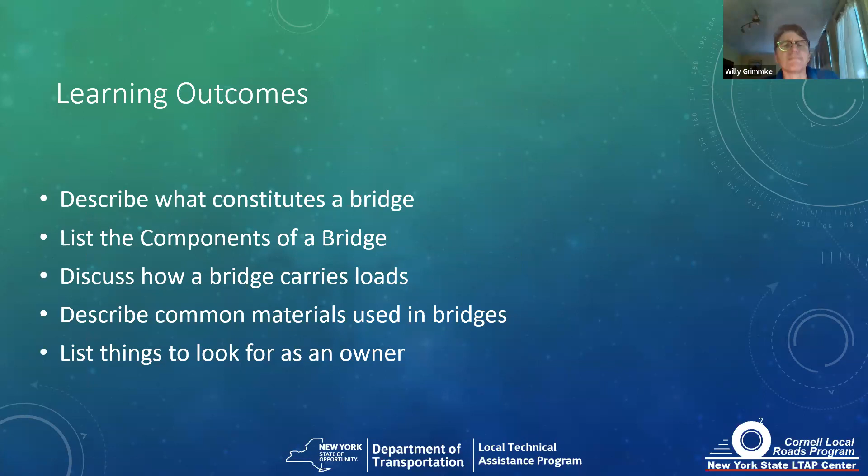I don't know what's going on with the poll, but let's try the next one. So I have, what is your primary job function? Let me launch that. All right, here we go. Primary job function: admin, superintendent commissioner, engineer, field crew, board member, or I don't do any of that stuff.

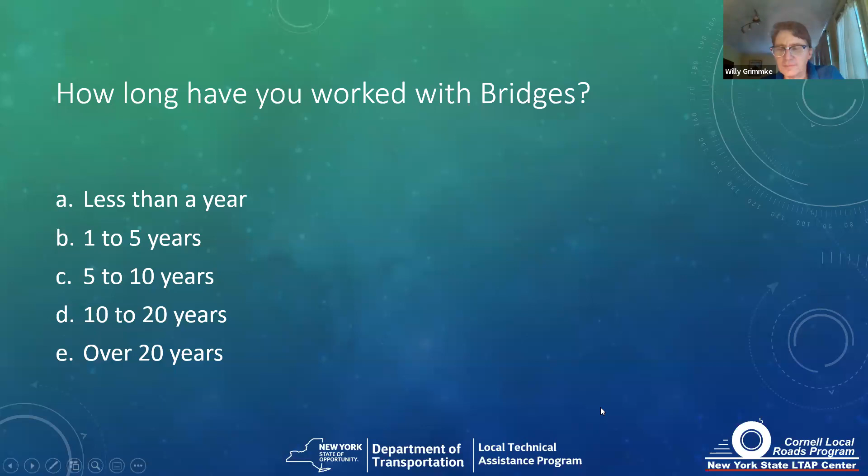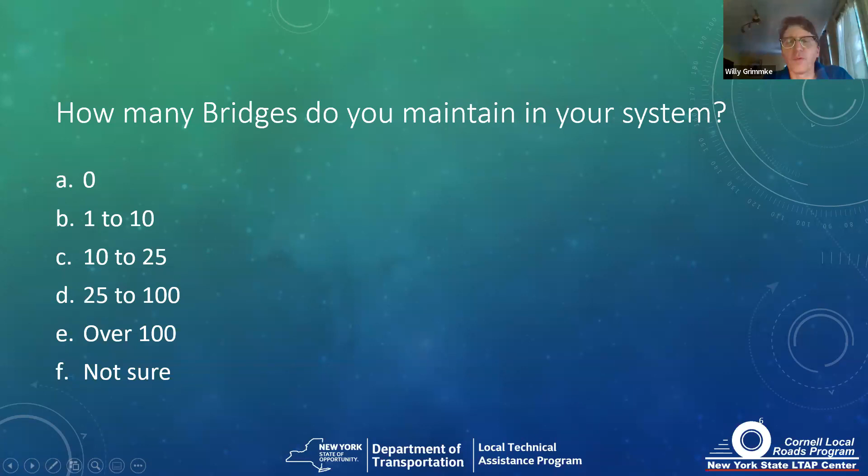But by definition, what is a bridge? The feds in 23 CFR 650 define a bridge as a structure, including supports, erected over a depression or obstruction such as water, a highway, or a railway, having a track or passageway for carrying traffic or other moving loads, with an opening measured along the center of the roadway of more than 20 feet. That's the magic number. Measured between the undercopings of abutments, or spring lines of arches, or extreme ends of openings for multiple boxes. It includes multiple pipes where the clear distance between openings is less than half of the smaller contiguous opening. So yeah, what does that really mean?

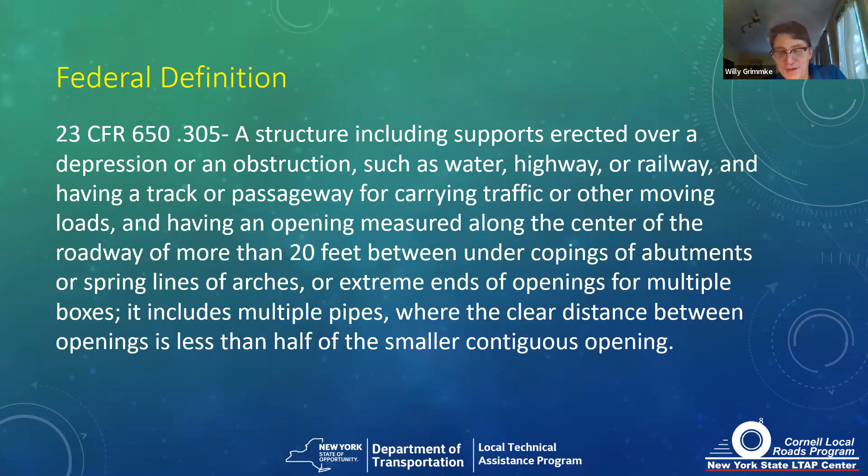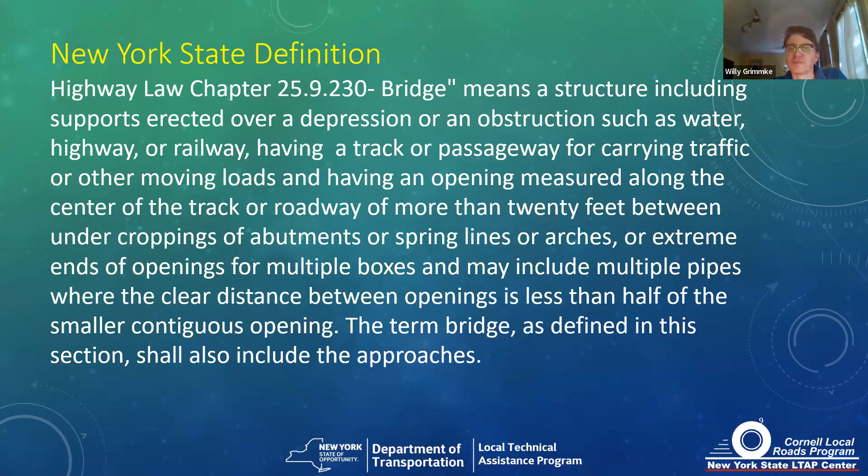Now, the state of New York has a very similar definition of a bridge in the highway law, chapter 25-9-230, which reads similarly: a structure, including supports, over a depression, over water, a railway, traffic track or passageway for carrying traffic, moving loads, and at the center more than 20 feet between undercopings of abutments or spring lines of arches. And the term bridge in this section also includes approaches. A little bit different, but very similar.

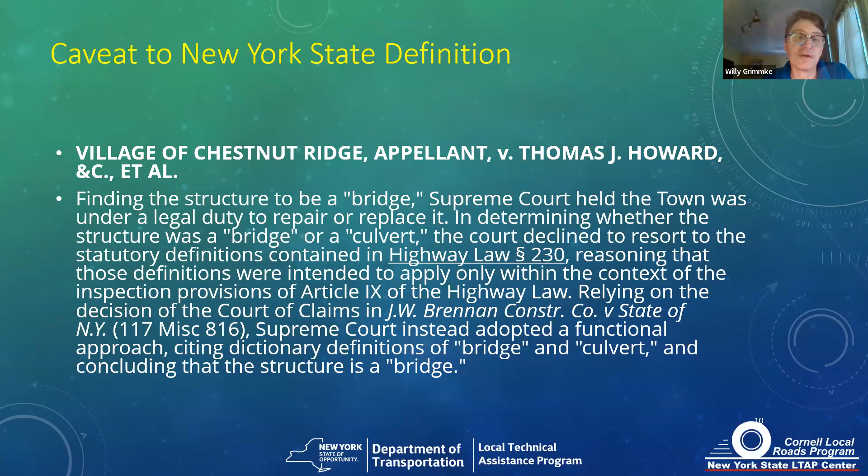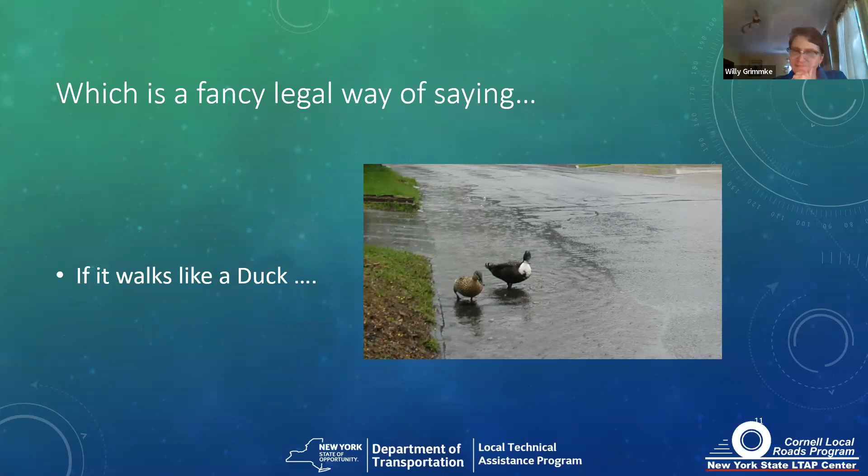However, there's a caveat to the New York State definition. In a Rockland County case, the Village of Chestnut Ridge appealed a decision, and the appeals court found that a structure, regardless of the span being 20 feet, adopted a functional approach, citing dictionary definitions of bridge and culvert, and concluded that this particular structure was a bridge, though it was less than 20 feet. So the town was compelled to replace it because it was a bridge. That is the fancy legal way of the New York State Court of Appeals saying, if it walks like a duck, talks like a duck, it's a duck.

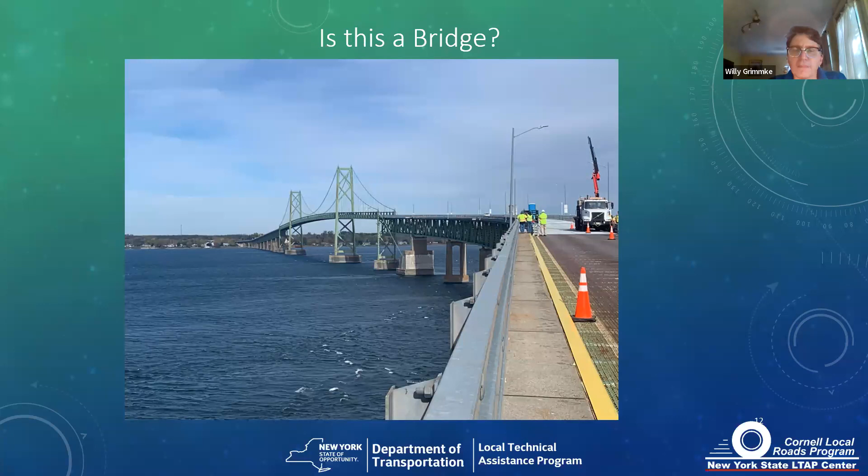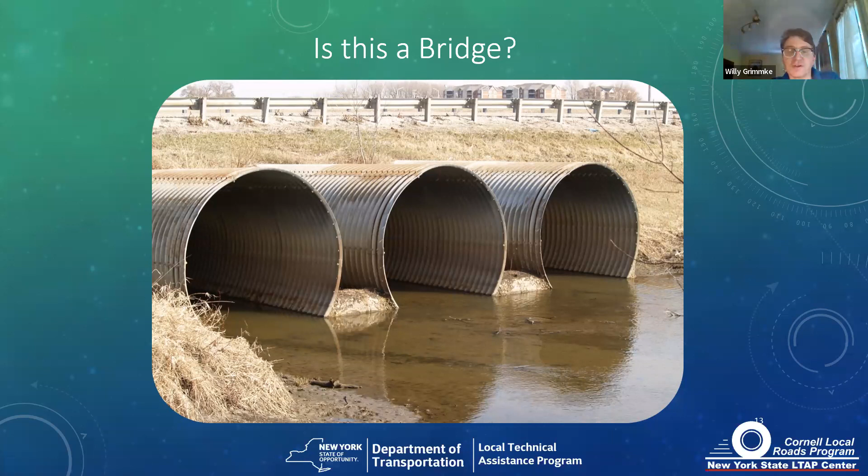So next one, is this a bridge? Okay, survey says 49% say yes, 51% say no. Depending on the dimensions, the answer is maybe. If the distance from the outside spring lines of the far pipes is more than 20 feet, and the distance between the pipes is less than half the diameter of any pipe, it would be a bridge. If each individual pipe is less than 20 feet, but they're stretched apart from one another more than the diameter, it would not be. So you'd have to carefully look at what configuration you have.

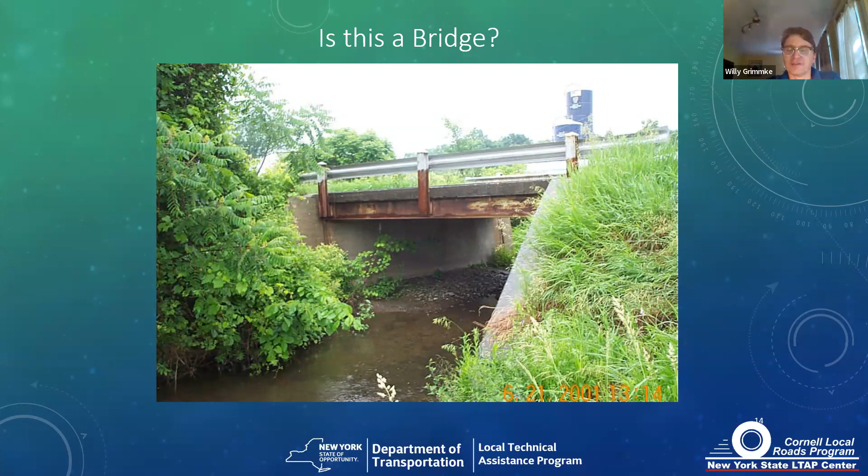So is this a bridge? We have 76% say yes, 24% say no. This is another one that falls under the maybe category. If the distance from abutment to abutment is more than 20 feet, yes, definitely it is. If it's less than 20 feet, by the New York State Court of Appeals definition, it's a bridge. But as far as the federal National Bridge Inventory System and whether it's getting inspected on a regular basis, the answer would be no, it would not. So again, you have to know the size of the structure.

So why does it matter if something is a bridge or not? Well, if it's defined as a bridge under the federal definition, it falls under the National Bridge Inventory. And if it's on the National Bridge Inventory, it has a unique bridge identification number, as shown here on the abutment. This one is 3306230.

All bridges, according to federal law and in New York, are inspected every 2 years, every 24 months. The inspection reports are forwarded to the owner for review. I used to have inspection reports coming across my desk throughout the course of the year, so we at the county could see what the conditions of the bridges in our inventory were. Those inspection reports had a lot of useful information, and gave us a good idea of bridges we needed to take a closer look at or perhaps schedule maintenance for.

The inspections, if inspectors find issues with the bridge, may issue flags. In New York, we have a flag system where red flags, yellow flags, and safety flags are issued. Typically, safety and red flags require some sort of prompt action, either within 30 days or 24 hours, depending on the severity of the issue, and that action may include closing the bridge. Yellow flags indicate there's a problem that needs to be closely watched. Typically, if a bridge is receiving flags, it is scheduled for annual inspections or interim inspections to follow up and make sure the situation is not deteriorating further.

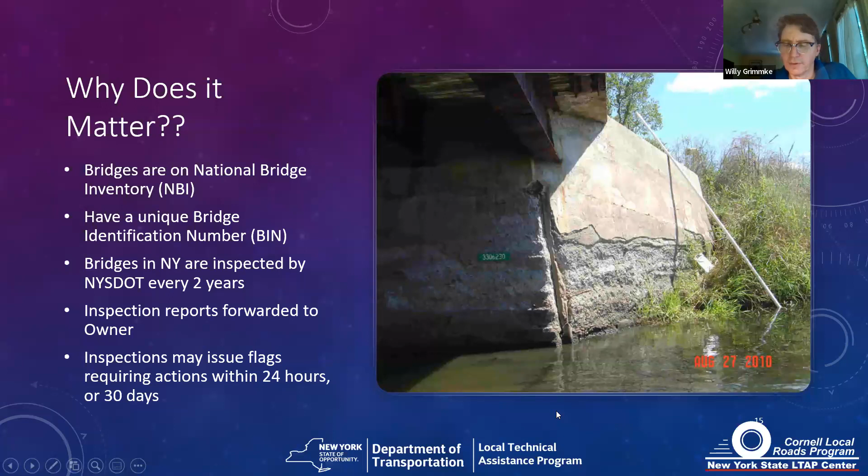Okay. So, bridges versus culverts: bridges, by federal and state definition, have a span in excess of 20 feet.

Going to the Court of Appeals definition, a bridge has some sort of superstructure supported by substructure elements, and the superstructure, the girders in this case in the photo, carry the loads. Hydraulically, bridges are typically designed to pass whatever the design storm is and have a minimum amount of freeboard. Ideally, you don't want water washing over top of the bridge or into the superstructure unit.

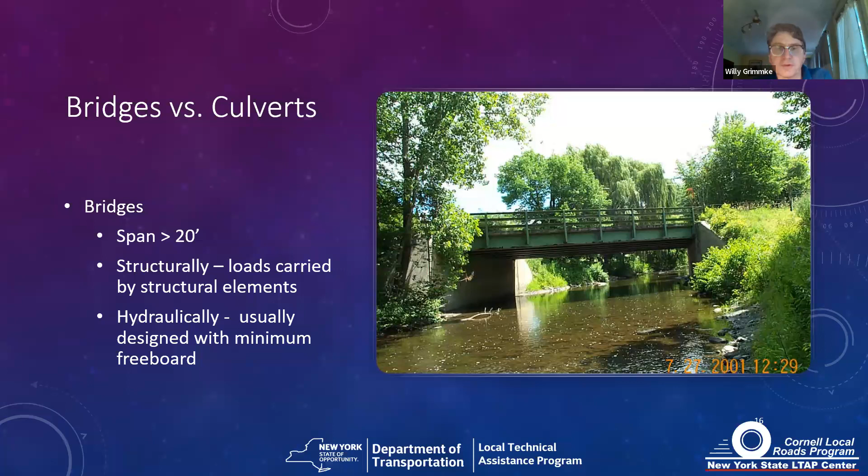Now, culverts, on the other hand, the New York State and federal definition is a span of less than 20 feet. In practice, we view large culverts for inspections and the like as in the 5 to 20 foot span.

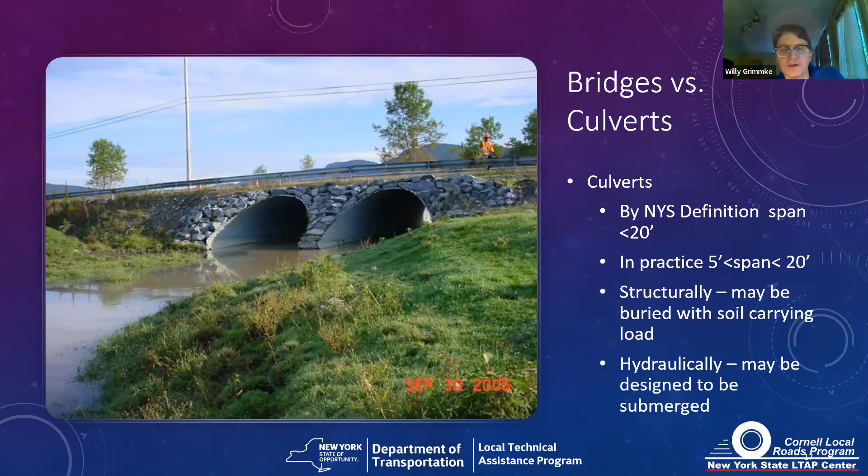But structurally, a culvert is a structure that is buried with the soil carrying a lot of the structural load, and the soil around the culvert transmits the load down into the foundation soils below. Hydraulically, culverts may be designed to be submerged. In this particular case, you probably wouldn't want it to be submerged too much or to overtop. But as you can see with the stone fill on this culvert, it assumes that the water could rise above the top or crown of the culvert during a large storm event.

So now we'll talk a little bit about bridge components. The 4 components of bridges include our deck, our superstructure, our substructure, and our foundation. We'll talk a little bit about each of these in more detail.

This is a photo of the Route 2 bridge over the Hudson between Troy and Watervliet. It's got a concrete deck and rail system. It's got continuous steel multi-girder superstructure. The substructure is concrete piers, and the foundation is down below the substructure and is hidden.

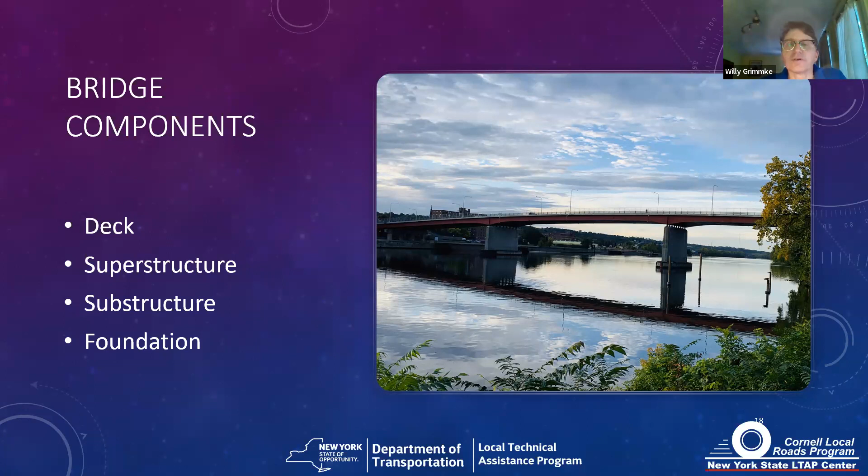So what is our bridge deck? Well, it's the part that carries the traffic loads. It's often concrete, and depending on the function of the bridge and who it's serving, it will be designed to accommodate the users. In this particular case, it's a concrete deck.

It's got 3-rail vehicular guardrail. If it were to have a lot of pedestrian traffic, a bridge like this might have elevated sidewalks and curbs. It might have a higher pedestrian type rail. In the photo we saw earlier of the bridge in Ogdensburg, that has an open grate steel deck, which is lightweight, but that bridge is also not designed or meant to accommodate pedestrians.

The deck is supposed to provide a nice smooth surface for traffic to ride over, and a concrete deck or other types of deck also provide a roof or cover to keep moisture and debris from getting down onto the superstructure and substructure elements. The Ogdensburg bridge had the open deck, and as a result, there was some deterioration of the substructure units because of the moisture going through the deck and corroding.

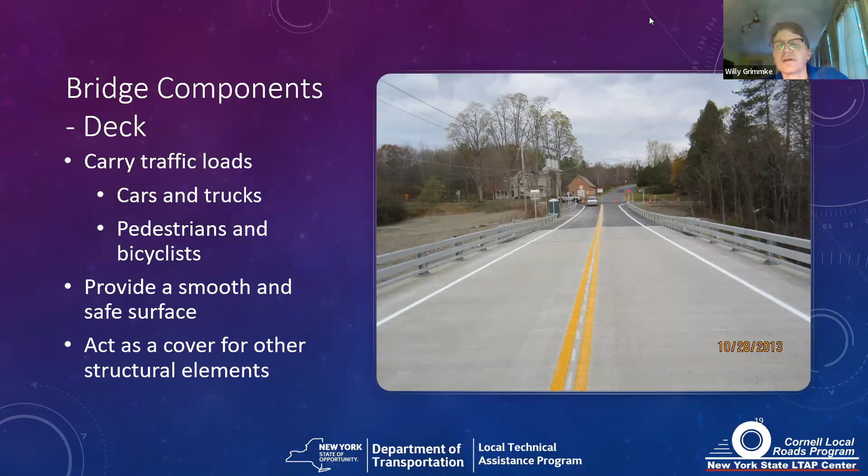Question: What's the guide rail versus pedestrian guide rail heights? The pedestrian rail will typically be in excess of 42 inches because that's the OSHA safe fall protection requirement height, where the vehicular rail will be in the 34 to 36 inch range. I don't recall the figure exactly, but it's in the New York State DOT standard details for rail.

Okay, we move on to superstructure. So this is what carries the load or spans from abutment to abutment or substructure unit to substructure unit, and it transmits the load from the deck to the substructure.

Now, in the photo here, this is a cable stayed bridge. I believe this is the Tappan Zee Bridge across the Hudson, and the superstructure elements on this one are the towers, the cables, and the deck elements and girders that the cables are tied into.

It may be just a concrete slab. State of Wisconsin has lots of concrete slab bridges. They just form and pour a reinforced slab to span their relatively short spans.

The most common thing we see around the country is multi-girders as superstructure units. You'll see multiple steel girders or multiple concrete girders, and those are transmitting the load from abutment to abutment or pier to abutment, between the substructure units.

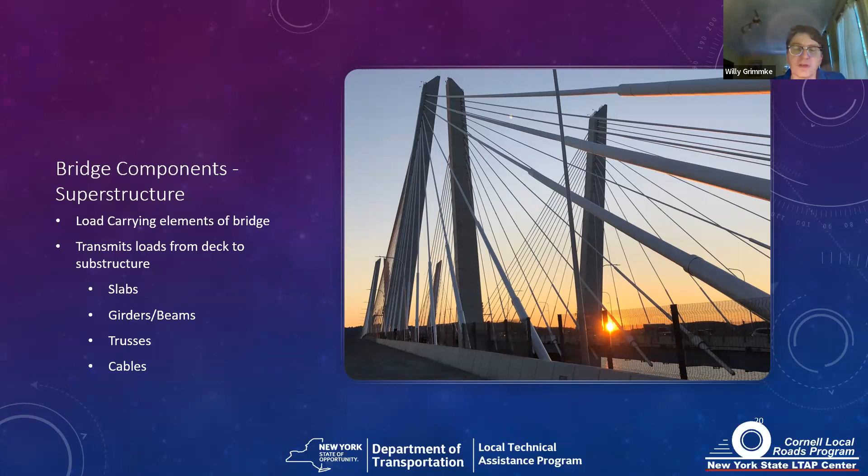Substructure components transmit the load from the superstructure down to the foundation. These are substructure piers on the Tappan Zee Bridge, and on the approach spans our superstructure is steel multi-girders, steel plate girders, and the substructure units carry the load from the superstructure down to the foundation.

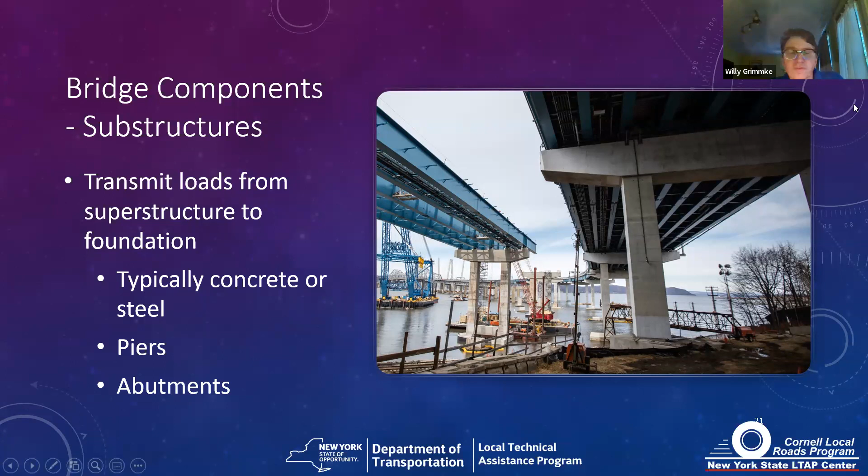Substructure elements are commonly concrete, sometimes steel. We have the abutments, which are at the beginning and end of the structure, and then the piers, shown here, if intermediate support is needed.

And then down below our substructures. We have our foundations, and they may be a variety of things. They transmit the load to either sound-bearing soils or to rock. In this photo here, this is driven H-piles, and they were driven down to rock.

Sometimes H-piles may be driven to rely on skin friction. In Texas and other parts of the country, drilled shafts are often used rather than H-piles, just due to the geology. The drilled shafts may rely on skin friction, sometimes they will be end bearing. And then commonly in parts of the country where rock is very close to the surface, we may have spread footings.

Also, we may have spread footings where we're not worried about scour. You're not over a waterway, and the soils underneath are relatively sound, and we're not concerned about settlement.

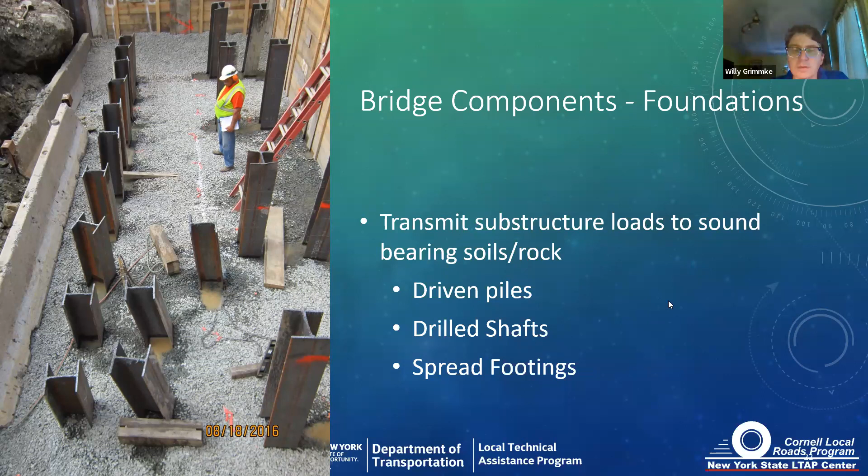So we're going to talk a little bit about bridge terms, basic nomenclature. Here, intermediate support is a pier, and as part of the pier we have a column. Between columns on our pier we have or may have a pier cap. Under the columns, we may have a footing or pile cap, and we may have piles if it's supported by a deep foundation.

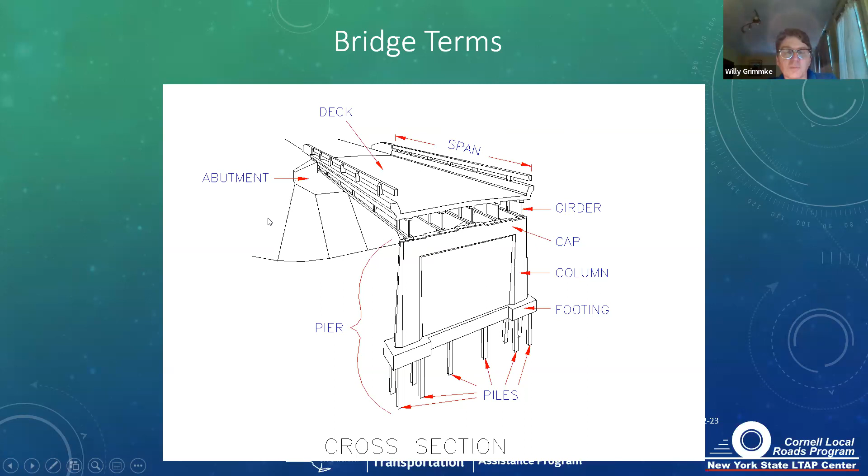In this particular bridge, we have a multi-girder bridge, so we have girders. We have our deck. We have our span, which is from center line of bearing to center line of bearing of our superstructure elements. And we have our abutment, which supports either the begin or end of our bridge.

Here's a composite bridge, a variety of foundations and supports in a longitudinal section. So we have beam seats, we have our pier caps, we have our abutment at the begin end of the bridge, and we have columns with a 2-column pier.

We have piles and a pile bent pier. This doesn't have any separate footing or cap. You just have a pile cap, and just drilled shafts or driven piles as foundation.

We have our beams and girders up here. We have our beam seats where they sit. We have piles supporting our abutment.

We have our deck. We have an approach slab, which some bridges may or may not have, but that basically spans from the beginning of the bridge back into the approach embankment and helps to compensate for any potential settlement you may get. We have our roadway.

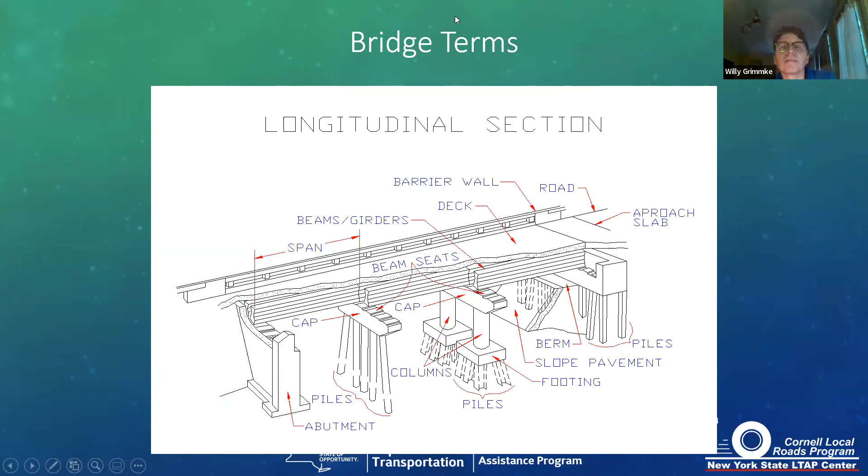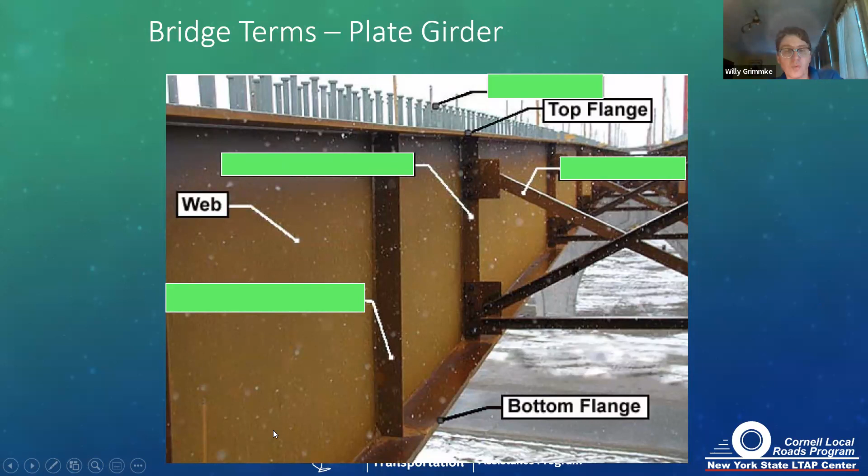And here is a plate girder, and the various parts or components of a plate girder, which include our top flange, which is the horizontal top piece on the top of the girder, bottom flange, the horizontal piece on the bottom of the girder, and the web, which is the vertical between the top and bottom flange.

The connection stiffener, and this stiffener is connecting the diaphragm, K-brace. Terminology varies from part of the country to part of the country, but that connects the girders to one another. Cross frame is another term that's used.

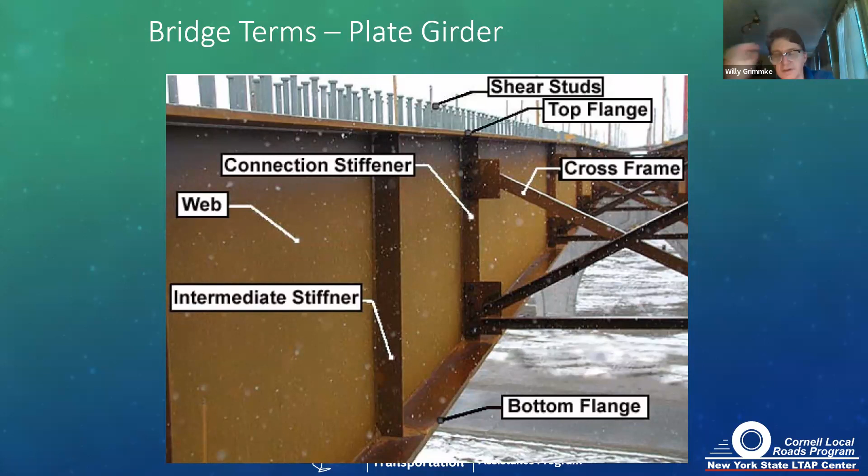And then if the structure is built in composite, designed to be in composite with the deck acting as a stiffening and augmented compression flange, there will be shear studs. Most current bridge construction now, bridges are built in composite, and the shear studs are on that top flange to anchor the deck into the superstructure.

So on trusses, terminology for those is the top chord, that top element across the top of the truss. The bottom chord is the element along the bottom of the truss. Diagonals connect the top and bottom chord, and verticals also connect top and bottom chord.

And gusset plates are these plates here at the connection points that connect top, bottom, diagonals, and verticals together. Those gusset plates are critical in the performance of the truss. Unfortunately, with the way gusset plates are located, they are often subject to corrosion and can accumulate debris.

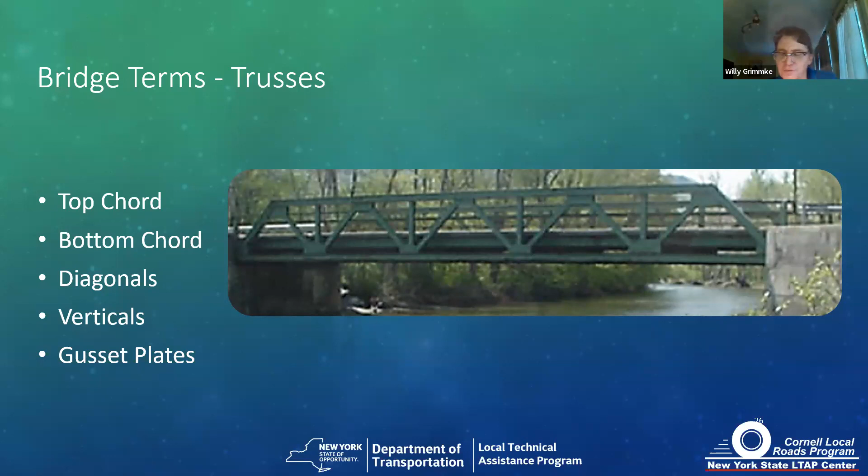Now, underneath our trusses, rather than the multi-girder and cross frame which we saw in the plate girder diaphragm, we have a slightly different arrangement here where the floor beams span between the two trusses on either side of the bridge, and then the sleepers or stringers are between the floor beams, and they support the deck. And then with trusses, we may also have diagonal bracing underneath.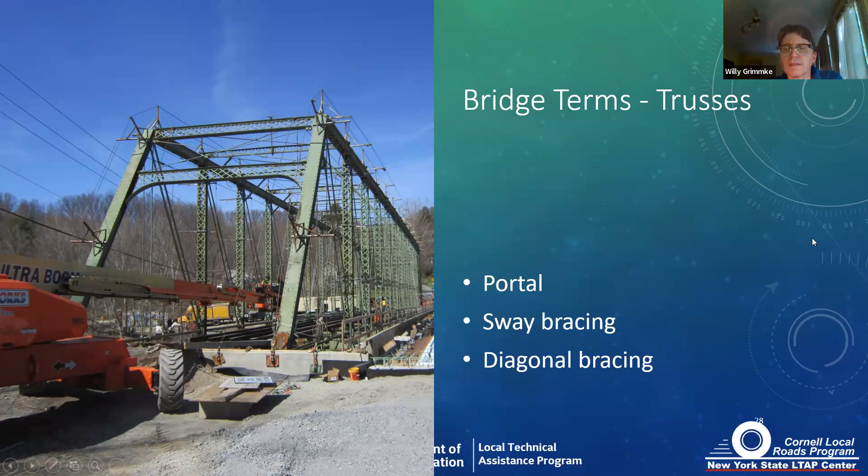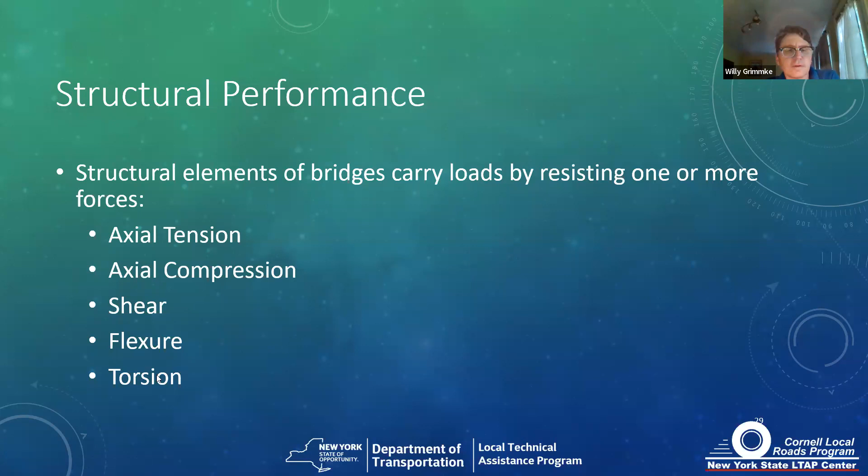So, structural performance. How does this all work? Well, the structural elements of the bridge, being the deck, the substructure or superstructure, resist one or more of the following forces: axial tension, axial compression, shear, flexure, or torsion. And we'll go through where we are.

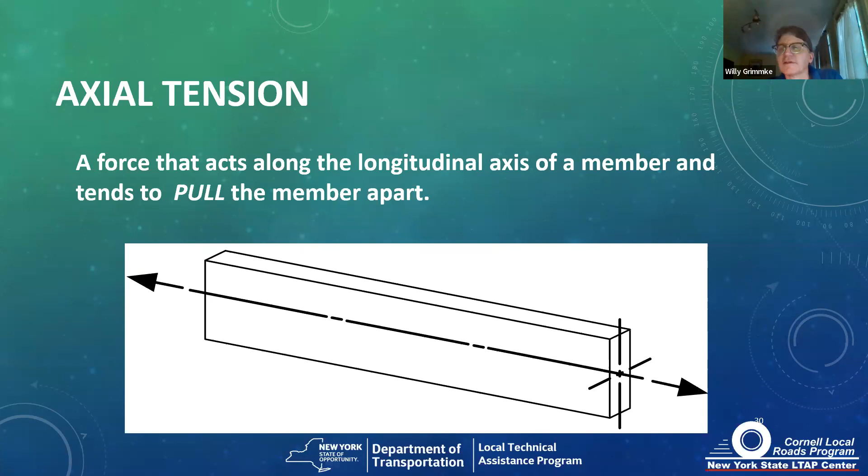Axial compression is a force that acts along the longitudinal axis of a member and tends to push the ends of the member together. Examples of axial compression would be a column, because the weight from above is tending to push down and push the ends of the column together.

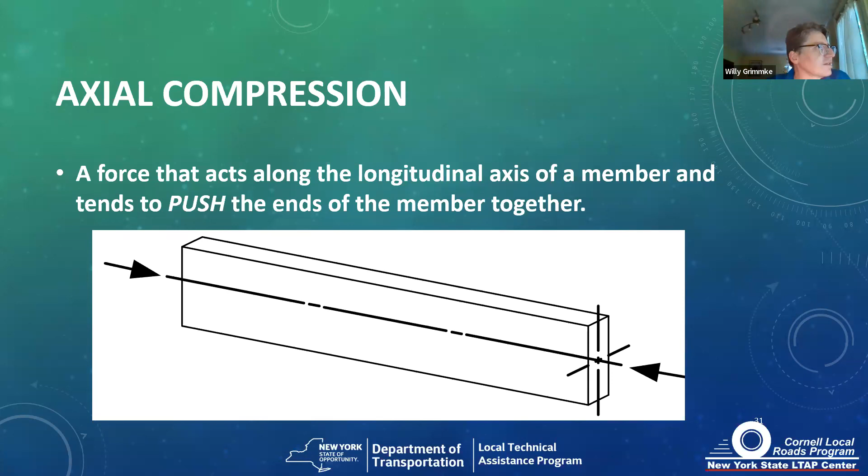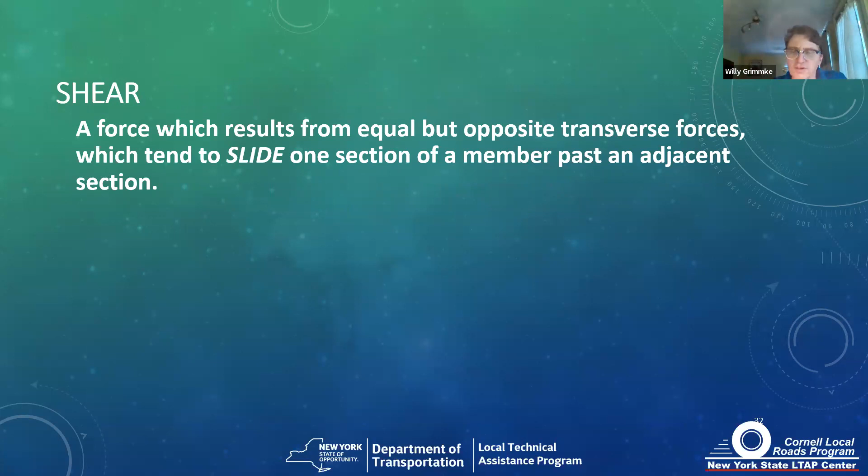Shear is a force which results from equal but opposite transverse forces, which tend to slide one section of a member past an adjacent section. When you have shear, you've got vertical shear forces and horizontal shear forces, kind of equal and opposite. And when something fails in shear, it tends to fail on a diagonal.

Places where you have shear forces would be in superstructure elements near the bearing, where you've got the weight of the bridge, all the dead and live loads pushing down, and you've got the reaction at the bearing pushing up. So that's where we tend to have a lot of shear forces, is right near the bearings.

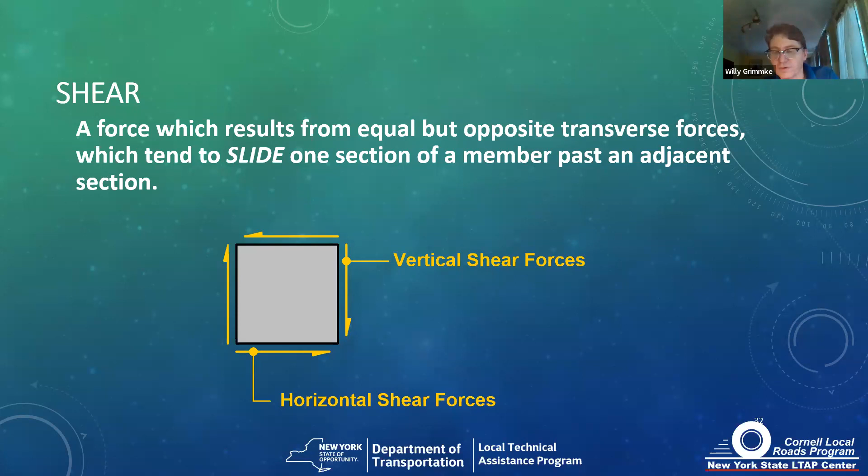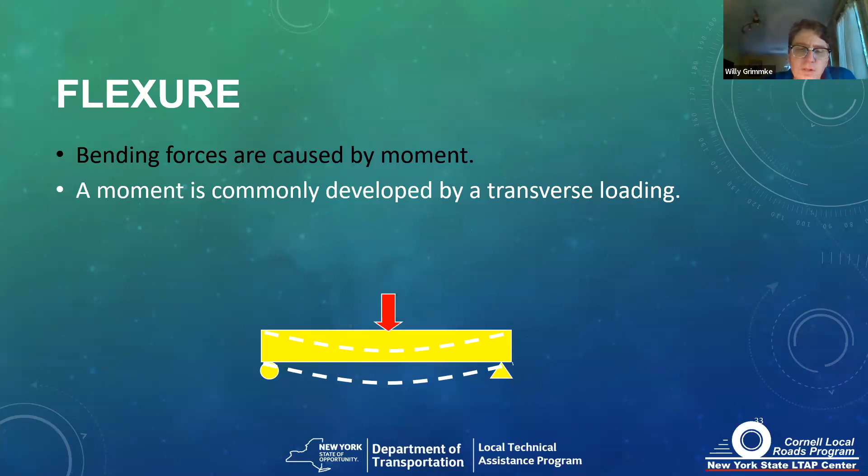Flexure. What flexure is bending forces, which is caused by a moment, and the moment is typically developed by transverse loading. This would be your beams or girders, where the loading is not along the length of the element, but to the side of it, and tends to make it bow or flex.

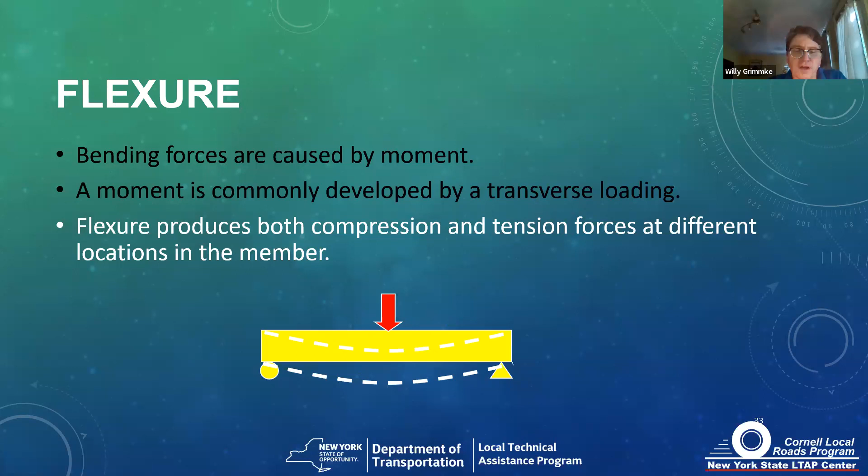What flexure does is it produces both compression and tension in the member. As you can see with this sort of smiley face deformed portion of the girder, the top is going to be in compression. On your plate girders and any other kind of girder with a simple span, your top flange is typically in compression, and your bottom flange, conversely, will typically be in tension. So, because the top flange is in compression, we often use composite concrete decks, and concrete is very good in compression and resisting compression. That way we're taking advantage of that material to do a job that it does well.

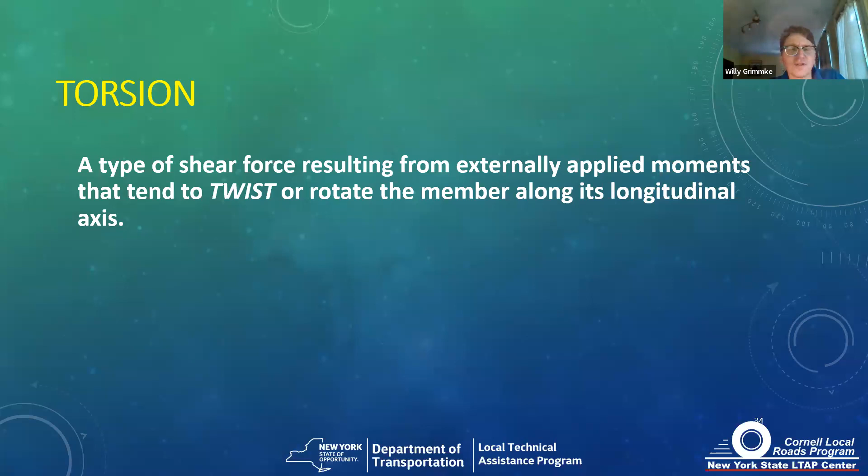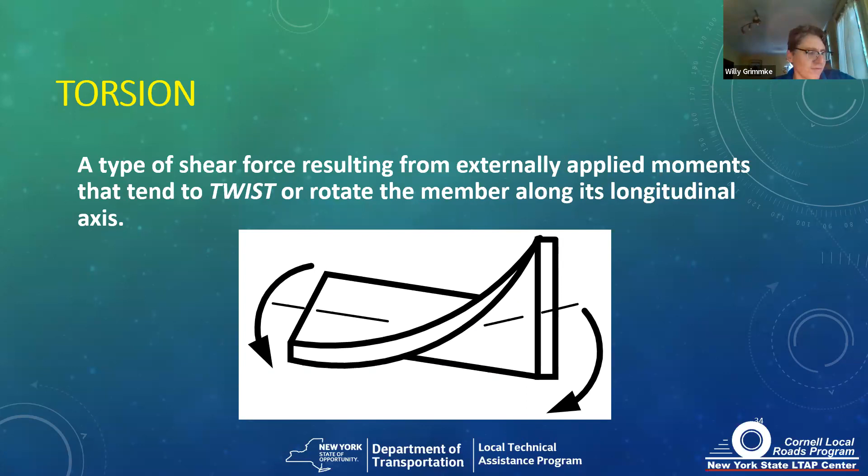Torsion is a kind of force that results from externally applied moments that tend to twist or rotate a member along its longitudinal axis. It's not something we often think of, but it's something we do have from time to time, is torsion. Not uncommon to have torsion in curved girders, curved girder bridges. You end up with torsion.

This is the Sunshine Skyway Bridge in between St. Petersburg and Bradenton, Florida. It's a single line of cables, cable stayed bridge, unlike the Tappan Zee, which had 2 rows of cables from the tower. This particular design, the bridge superstructure elements and deck are subject to torsion, and the shape chosen to resist that in this case is a trapezoidal concrete box, which is very good at resisting torsion. So that is an example of material chosen and shape designed to resist that torsion force.

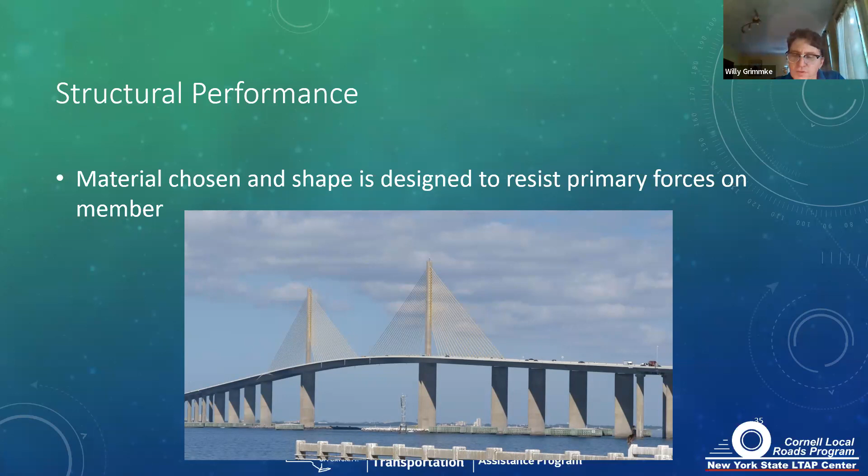Shear zone. Very often in shear zones, like around your bearings, if with concrete, you may have additional reinforcing stirrups. With steel bridges, you may have either stiffeners or additional web thickness.

High moment areas, which tend to be mid-span. On some of our old built up riveted plate girders, we may have additional thicknesses of steel known as cover plates.

And torsion members, as I described before, they may have either additional bracing, as we do with curved girders, with lots of cross bracing and some diagonal bracing, or we may, on a curved or subject to torsion load, go to a trapezoidal box.

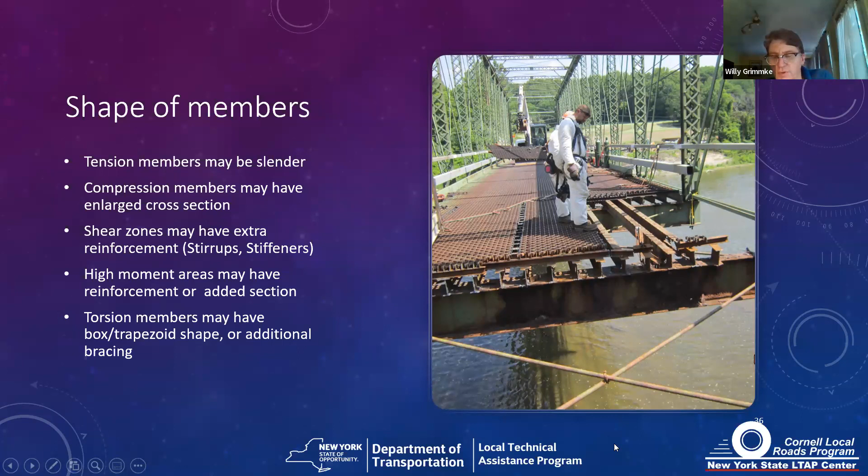However, right around here, we're going to get a stress reversal, and over top of the piers, we will have tension in the top flange and compression in the bottom flange, because this is acting as a cantilever. So just want to keep that in mind as you're looking at and doing maintenance work on your bridges.

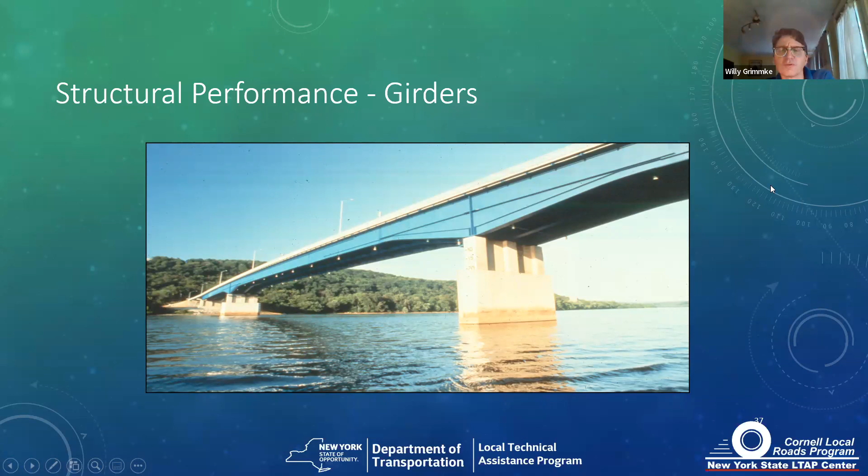Areas with high shear are right around the abutments, and we have a stiffener here to support the girder and augment the web, because there's a lot of shear here. Were we to have a shear failure, it would likely be a crack or distress that would be diagonal in this direction. You're more likely to see that with concrete.

With steel, it's not uncommon to see some sort of deformation if you have loss of strength or failure.

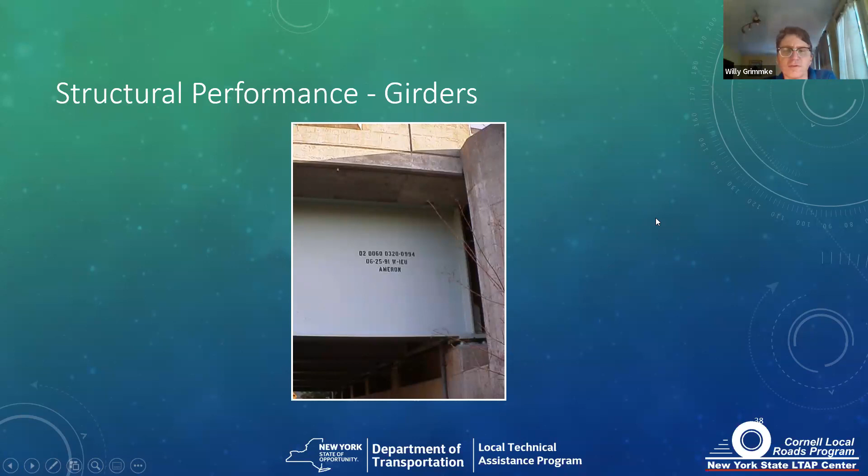So trusses, how do those perform? Well, with a simple span truss, we have compression members and tension members, and commonly the bottom chord is in tension, the top chord is in compression, and the diagonals and verticals may be in tension or compression, depending on how the truss is designed, and it may require some analysis.

But if we think back to the photo of the other truss, you can often look at the elements and have a pretty good idea based on how they're constructed, which is a tension or compression element. The tension elements tending to be more slender, and the compression elements tending to have a larger footprint or radius of gyration.

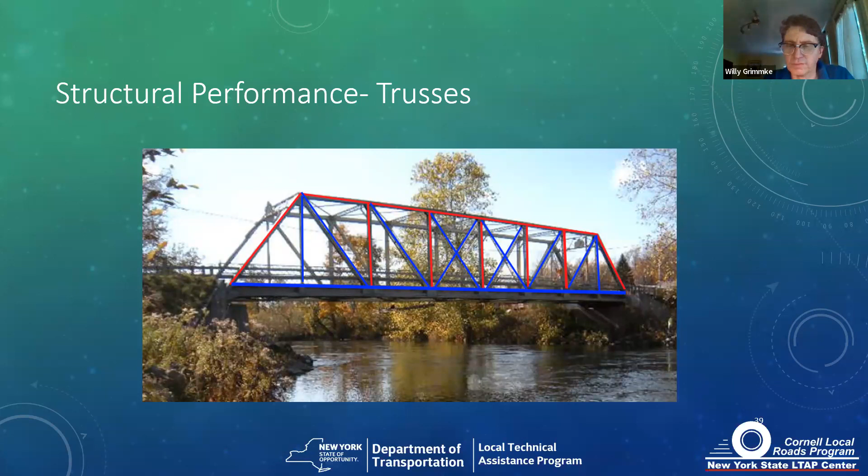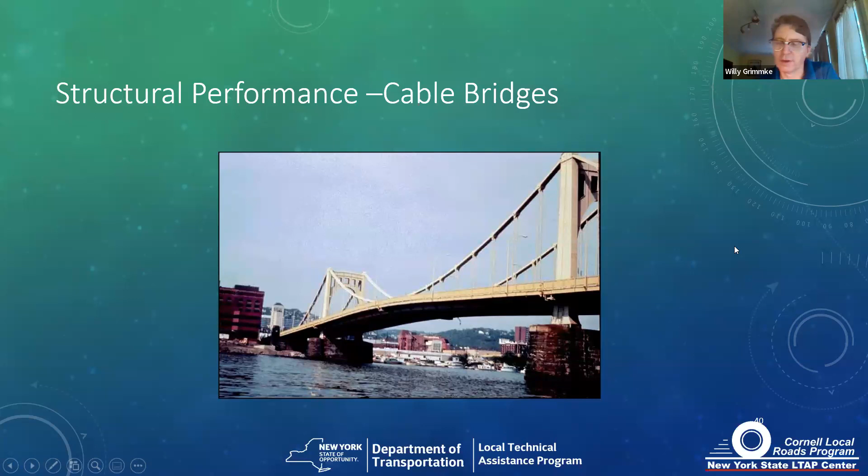So bridge materials, what does what well? Steel is very good in tension. Concrete is very good in compression. Timber is pretty good at both. Masonry is good in compression, but not great in tension. So what we do is use our materials in a way that we take advantage of the strengths of each.

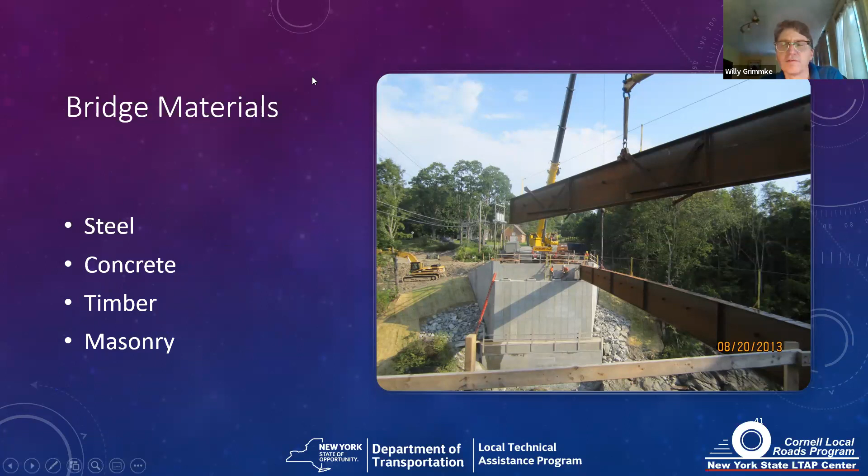So bridge materials, steel, you can do a lot of stuff with steel. You can shape it. It's pretty versatile. Here we've got this grasshopper or frame design bridge with steel substructure. Comes in a variety of grades from the old A30s and A36s of the mid 20th century up to the 70 KSI steel we're using now.

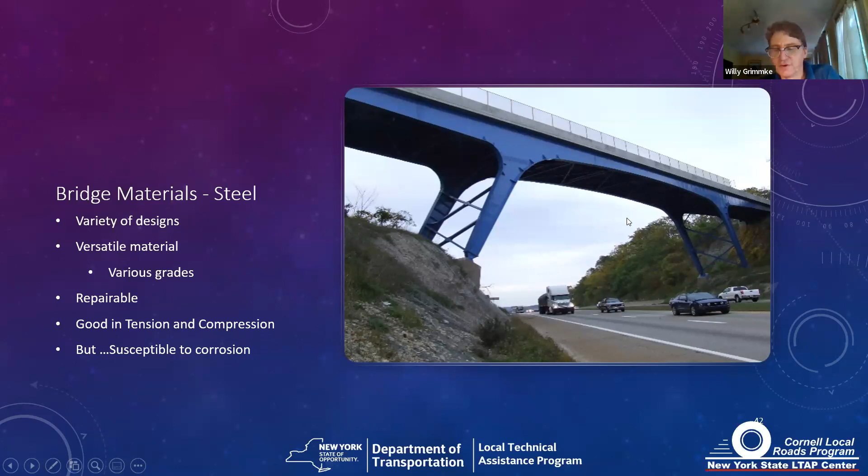As a bridge owner, I like steel a lot because we could fix it, with some plates, bolts, angles. We could bolt things on and repair it. It's good. Steel is great in both compression and tension, but the challenge with steel is it does corrode. So rust is an issue.

So good and bad with steel, you can build elegant, beautiful structures, but the downside is if you don't maintain your steel structures, they will corrode.

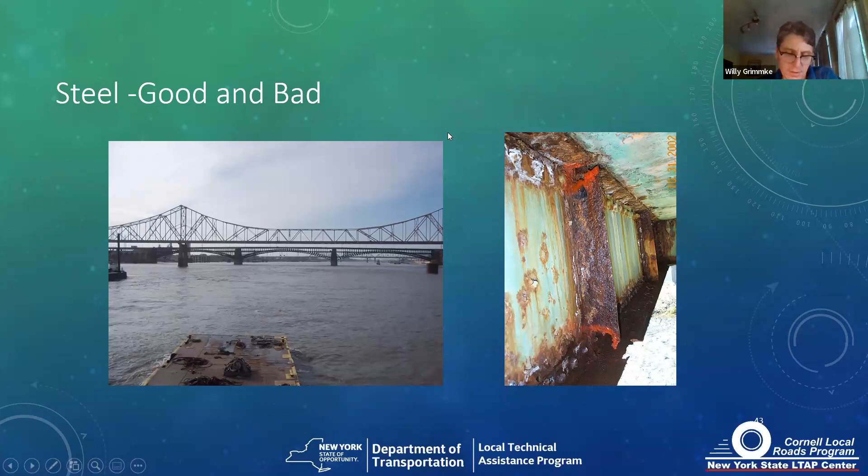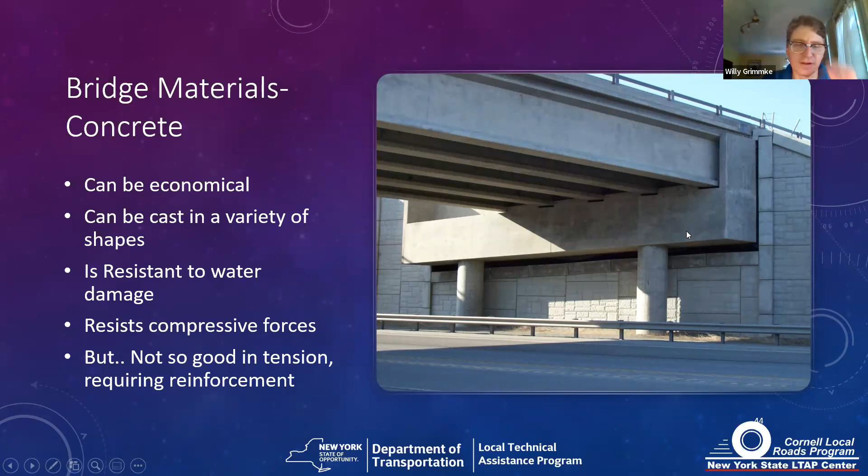Concrete, economical, variety of shapes. It tends not to be too susceptible to water damage and is really good in compression. Unfortunately, it's not so good in tension, which requires some sort of reinforcing, and typically we use steel for that. And that tends to be one of the Achilles heels, because if the water gets into the concrete and causes the steel to corrode, that can deteriorate the concrete.

So the good thing about concrete, you can precast it, you can cast it in place, and it can perform well for years. The bad thing is if you've got water infiltration causing your steel reinforcing to fail, you can start to get cracks, spalls, delaminations, etc., which will require attention.

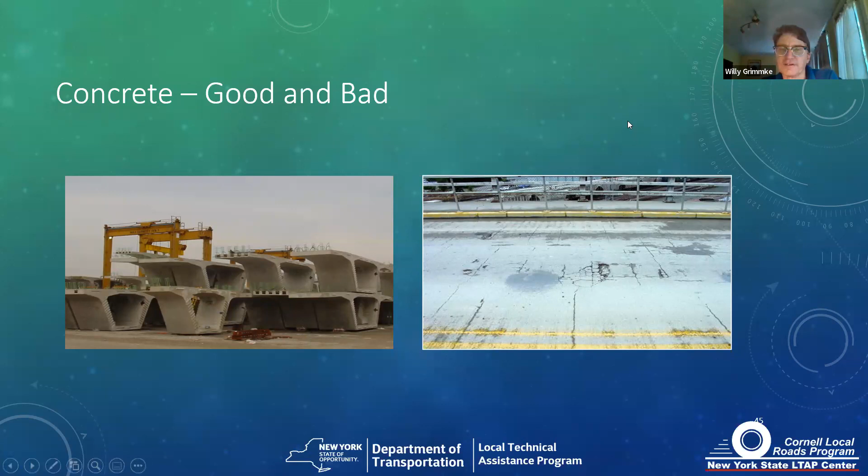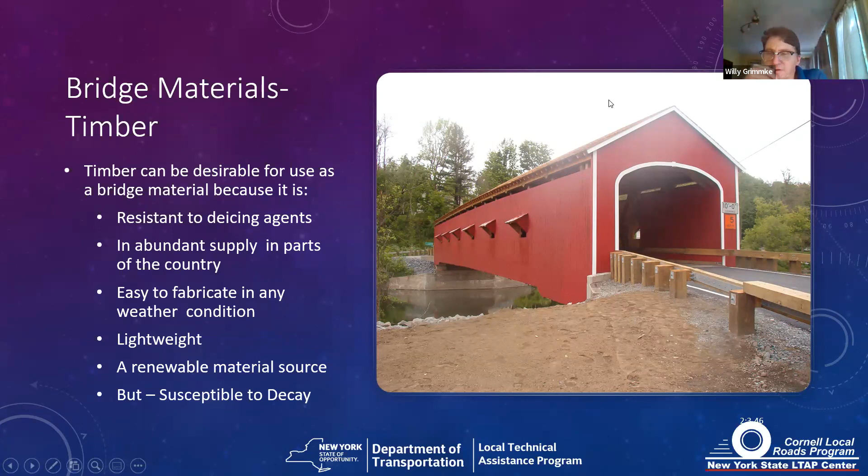Timber was used commonly in early parts of the country, like New England, where there was lots of it. It resists de-icing agents. It's pretty easy to build, and it is renewable, but it's susceptible to decay, which is why we build covered bridges, because the roof keeps the structural members from getting exposed to the elements and decaying. The covered part is a protective covering. It is, if you will, the same as painting your steel.

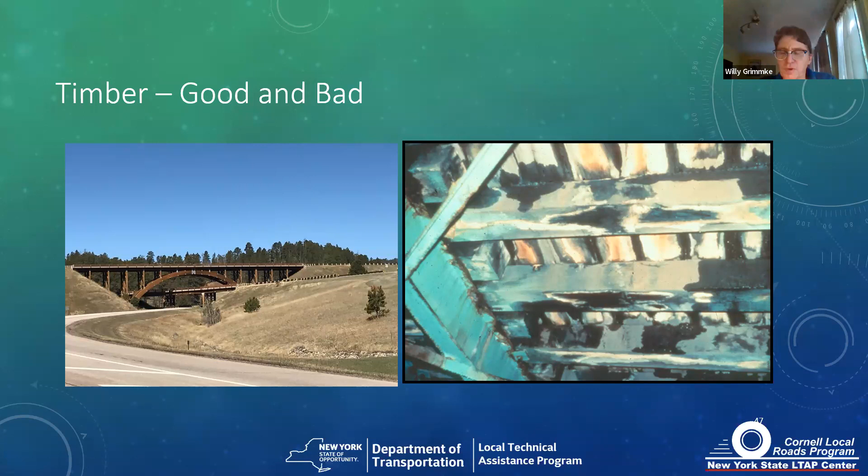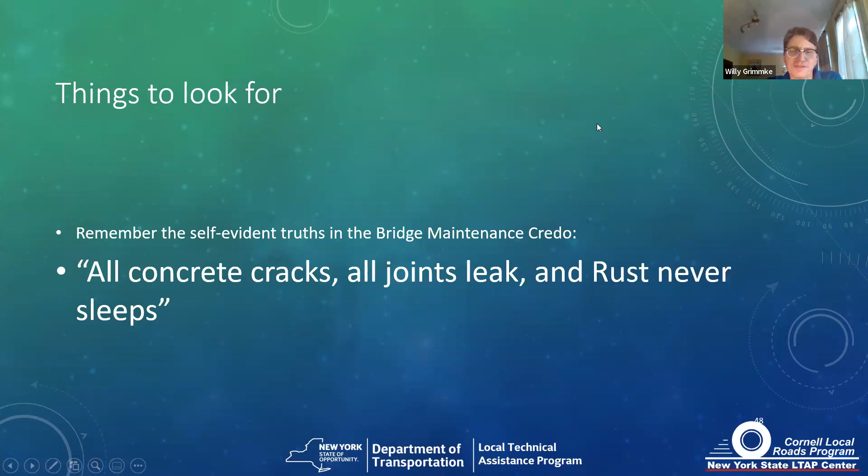So, things to look for. The bridge maintenance credo includes the self-evident truths that all concrete cracks, all joints leak, and rust never sleeps. Keep that in mind when you're looking at your bridges.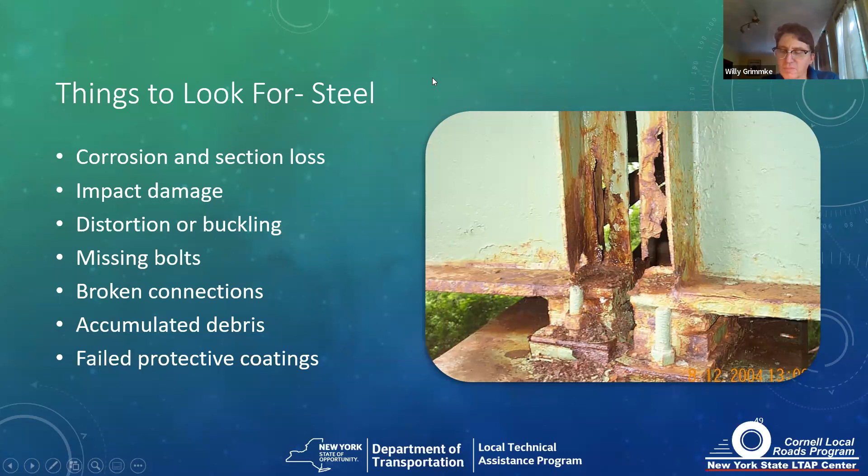In steel, you want to look for corrosion and section loss. You want to look for where it's been hit or there's impact damage. If you have corrosion and section loss, like under a leaking joint in this photo, you'll want to look for any distortion or buckling, broken connections. In this case, we have failed protective coatings, and if you have debris accumulating, it can accelerate the failure of your protective coatings and lead to corrosion and section loss.

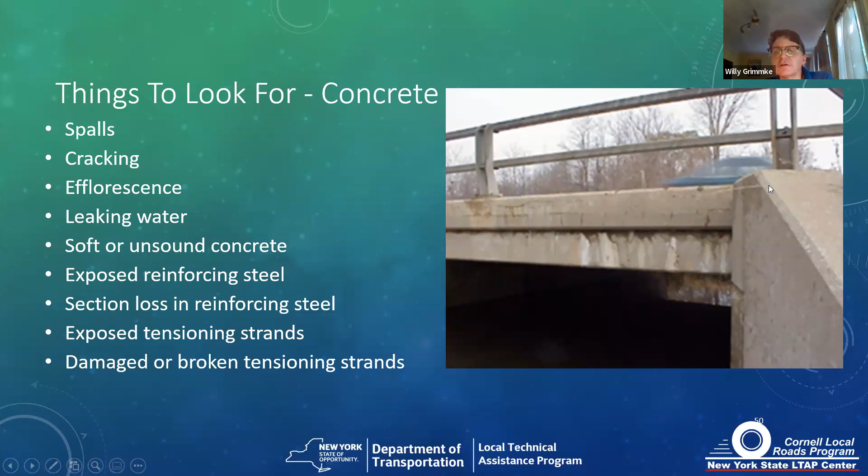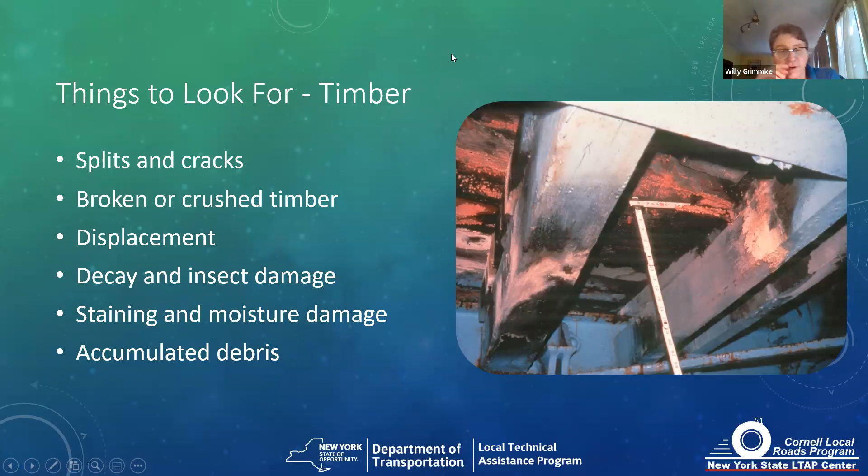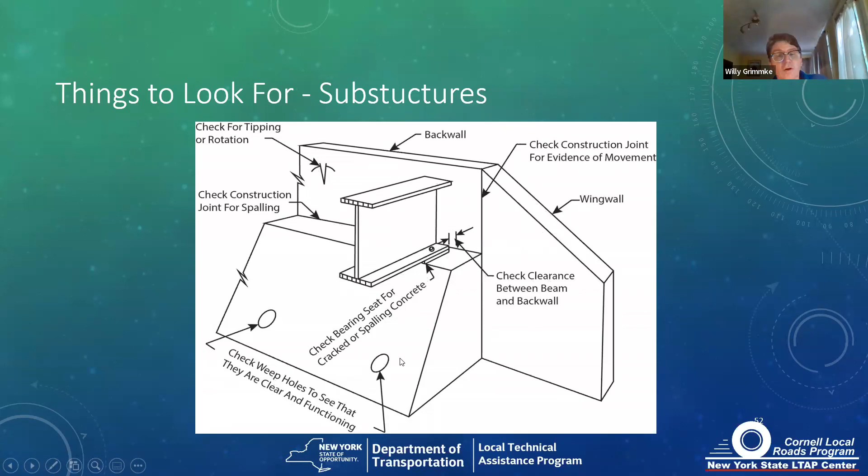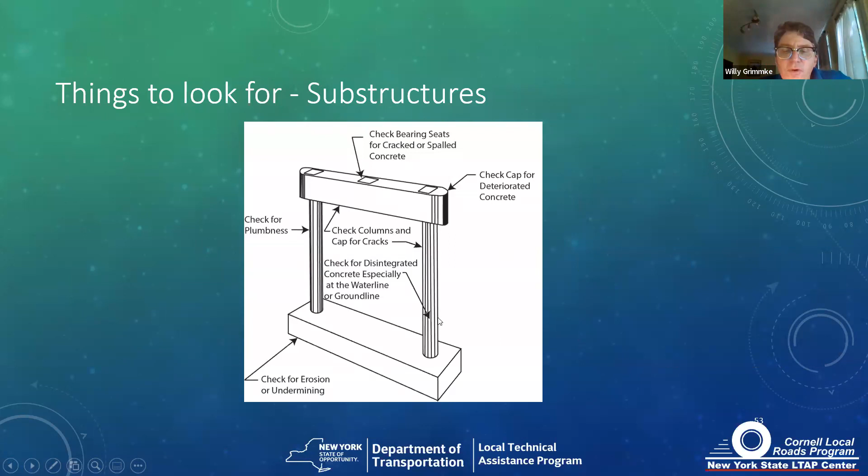Substructures on your piers—are they still plumb? Do you have any deterioration up around the pier cap? How do the columns look? If you have deterioration in your column or substructure units, it's often right near the ground, mud line, or water line, so you'll want to look there.

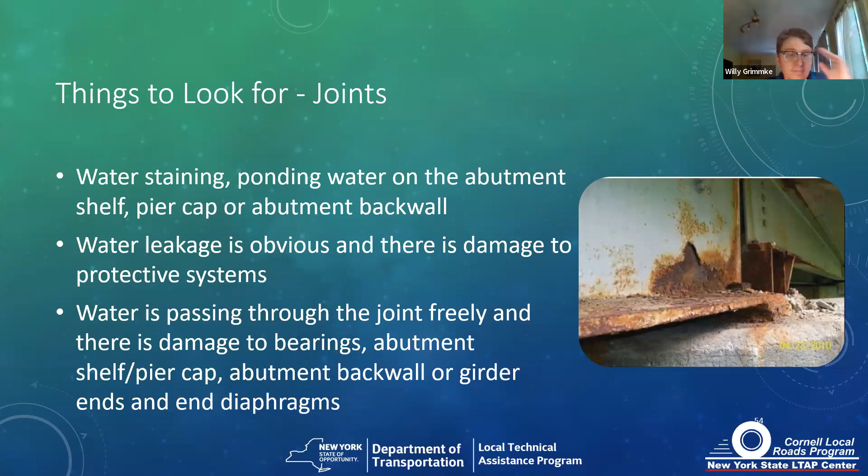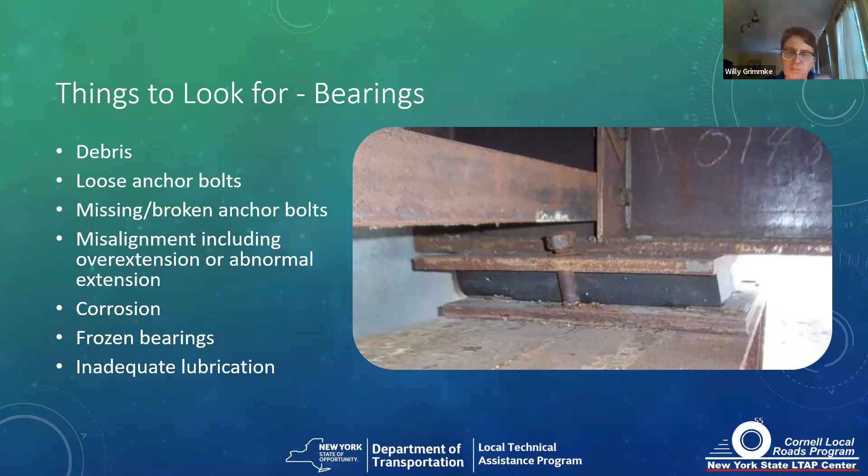Bearings: you have a lot of debris. Are your anchor bolts loose? Is everything aligned where it's supposed to be? This particular photo shows an elastomeric bearing that's overextended. We would expect to see something similar to this after a week of 100-degree days, but if it's wintertime and cold, this would be a red flag that something's going on with our bridge. Do we have corrosion at our joints? And are our bearings moving like they're supposed to? And if they're sliding plates or other types of older bearings, are they lubricated?

So now we're going to roll into our poll questions. By the federal definition, a bridge is longer than how many feet? 55, 30, 20, or 100?

Okay, 92% said 20. That is the correct answer.

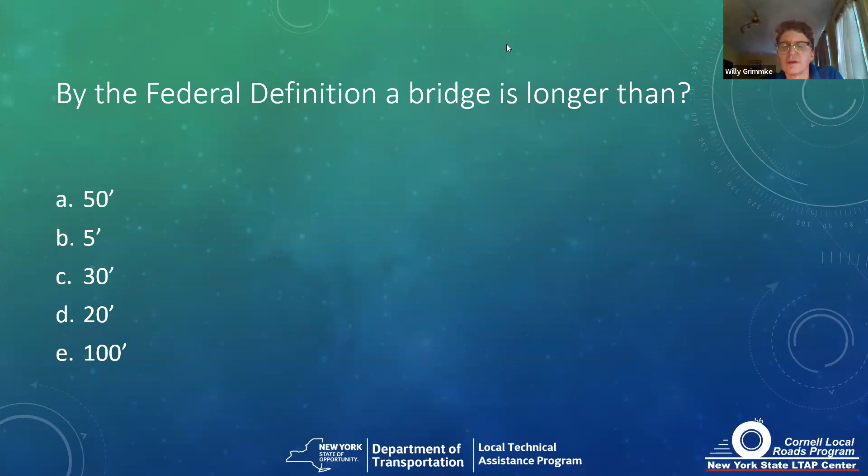Next question: What force tends to twist structural members? Flexure, shear, compression, torsion, or tension?

Okay, 94% said torsion. That is correct.

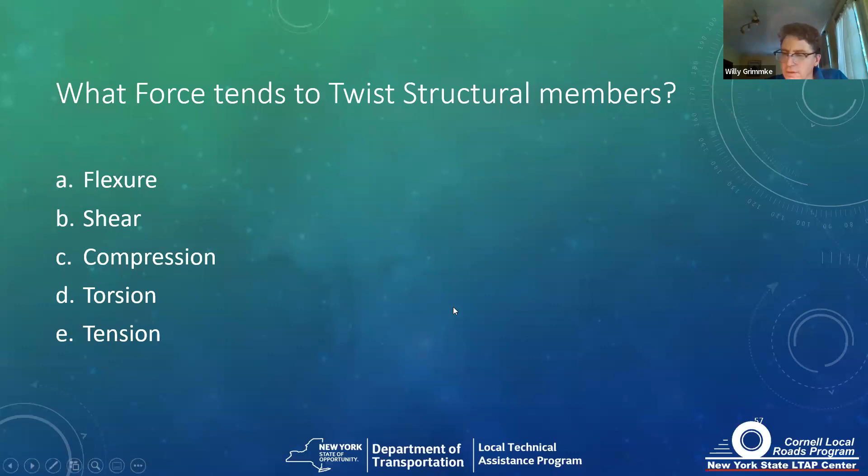What distress is not something to look for in steel bridge members? Corrosion, distortion, debris, impact damage, or decay?

In steel bridge members, decay is something you don't have to worry about—that's unique to wood. Corrosion is common, distortion can happen, we can accumulate debris, and we can get impact damage.

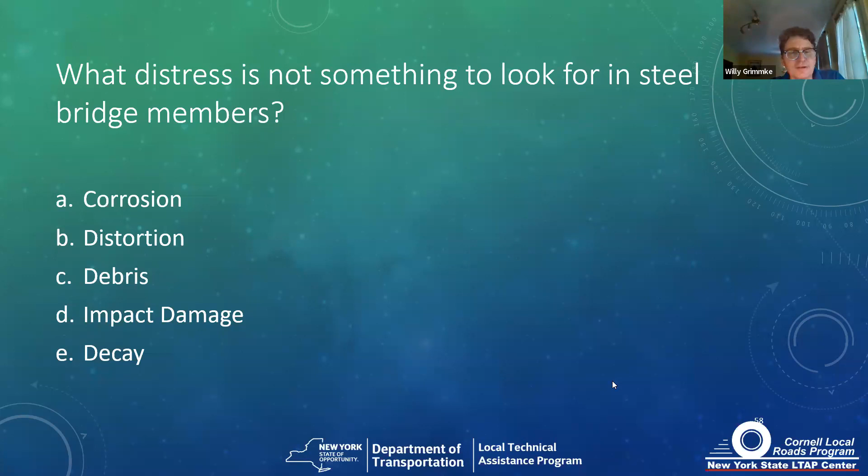So what part of the bridge carries the load from the deck to the substructure? A, superstructure, B, foundation, C, deck, D, joints, or E, bearings?

The answer we were looking for is superstructure, and in some cases, the bearings are considered part of the superstructure—so from the deck to the substructure. The answer we were looking for is superstructure, and bearings is kind of a trick question.

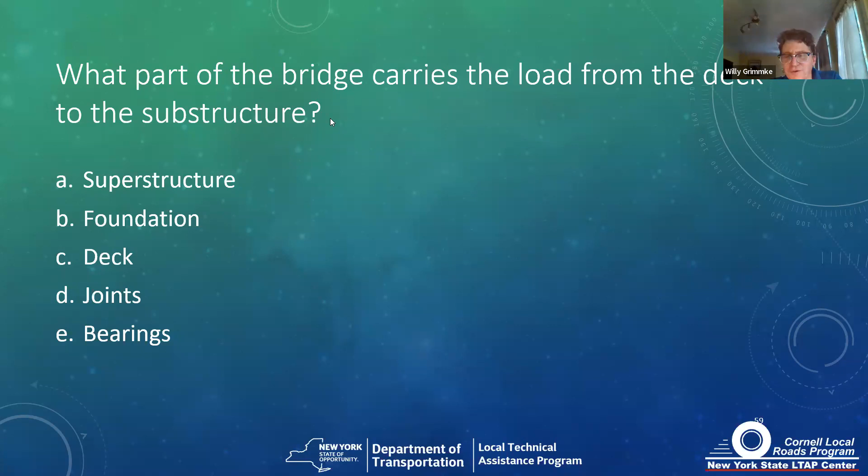Okay, so does anybody have any questions for me?